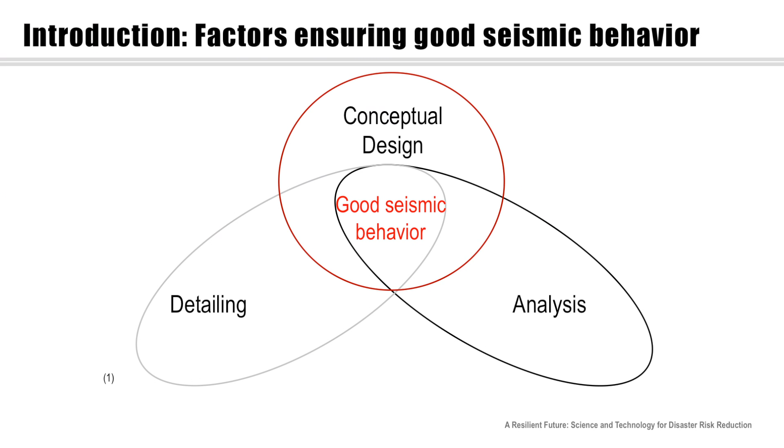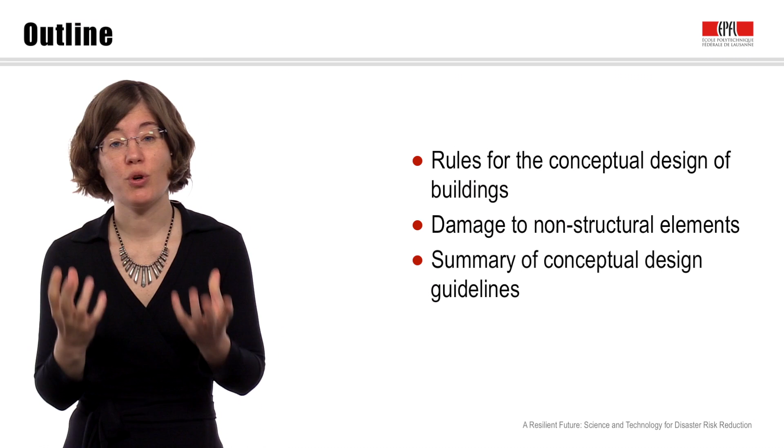This presentation starts with some general rules for the conceptual design of buildings. Then we will look at damage to non-structural elements - elements that are not important for carrying loads during an earthquake, but that can still be damaged. And then we will conclude with a summary of the main points.

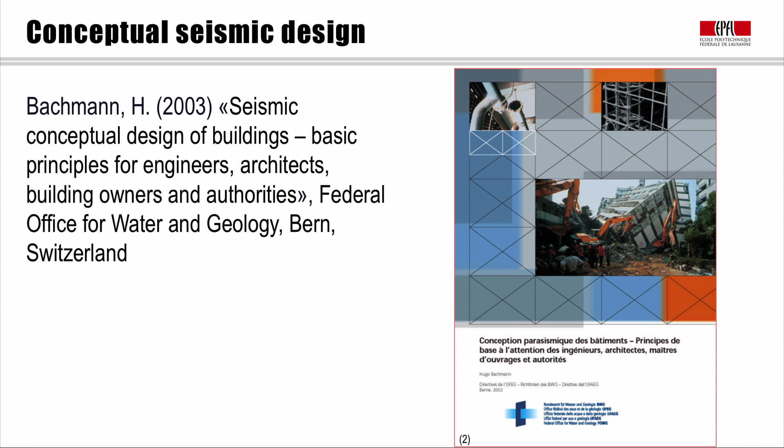A large part of this presentation is based on the booklet by Professor Hugo Bachmann, Seismic Conceptual Design of Buildings, which has been translated into many languages and is available online. It's an excellent introduction to the conceptual design of buildings.

The first step of the conceptual seismic design concerns the choice of the structural system. Many different systems can be chosen; the most common ones are structural walls or frames. Which system is most suitable depends on the height and the use of the building. Typical construction materials are reinforced concrete, steel, and timber.

All of these materials can behave well during earthquakes, provided they are designed so that the structural elements have sufficiently large displacement capacity. Masonry can behave well if it's reinforced. Also, in countries of low seismicity, unreinforced masonry buildings with stiff concrete slabs might be okay.

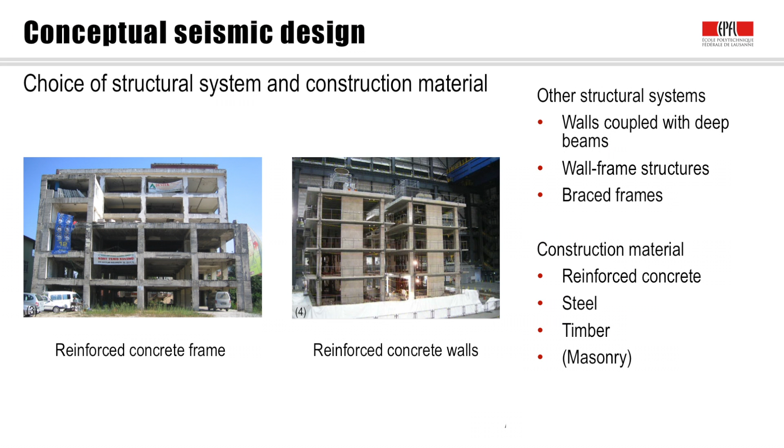However, stone masonry buildings, like those built in the past, or adobe masonry structures with flexible timber floors, are among the most vulnerable structures during earthquakes and often cause a large number of casualties. Independent of the choice of structural system, one should aim for a simple and robust structural system.

That means a system that is relatively regular in plan and elevation, and that has some redundancy. The behavior of a building is a very complex affair during an earthquake: the building is shaken in all directions, the loading is cyclic, going back and forth, and during a large seismic event, which drives our seismic design, we also expect buildings to undergo inelastic deformations. Simulating this behavior with computers is today still a very challenging task.

Moreover, we never know exactly how the next earthquake will look like. For this reason, it is really very important that we choose a structural system that is robust and simple, so that it's easier to understand, predict, and build.

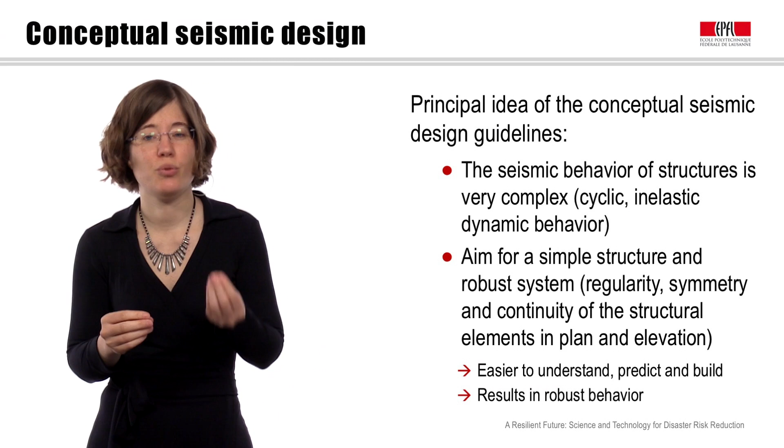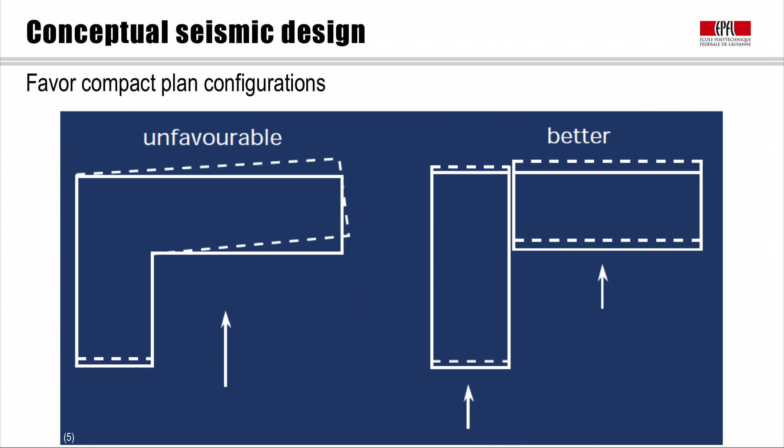To achieve this goal, we should aim for a simple and compact floor plan configuration. For example, if we have such an L-shaped floor, like here on the left, it might be better to split it into two rectangular floors, like here on the right.

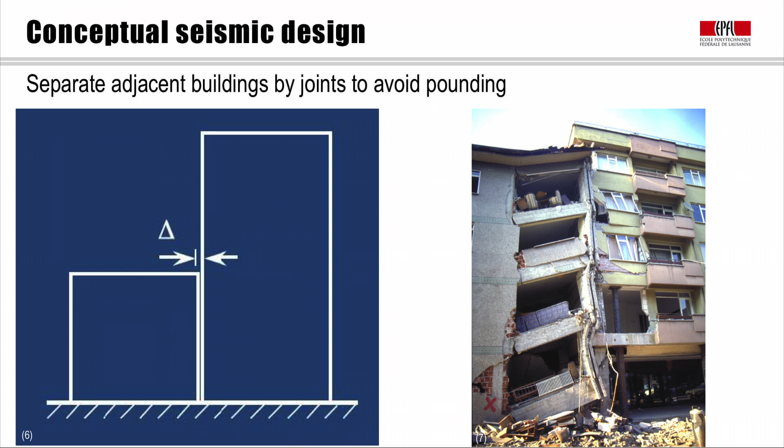But the building had another problem. Next to this complex floor plan, each wing was also made up of 2 structural systems. The main part of the wing consisted of frames, which are rather flexible, but the end part of each wing was the staircase, built with relatively rigid walls. So these walls are much more rigid than the frames, and during the earthquake the frames were leaning onto the walls and transferring their forces to them.

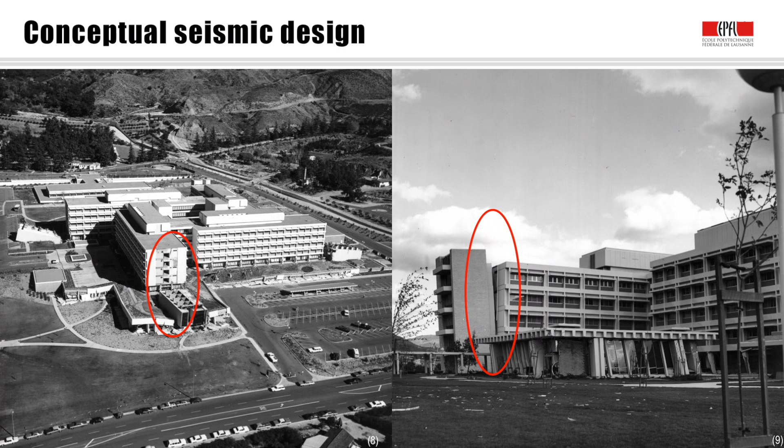So if you combine 2 structural systems in one building, it is important to remember that you need to design the stiffer structural element to take forces from the more flexible one, and you also need to design the slabs to transfer these forces.

So this wall is rather eccentric to the center of mass, which is at the center of the slab. Due to this eccentricity, the building will not only translate, but it will also rotate. So the behavior could really be improved if we added another wall on the other side.

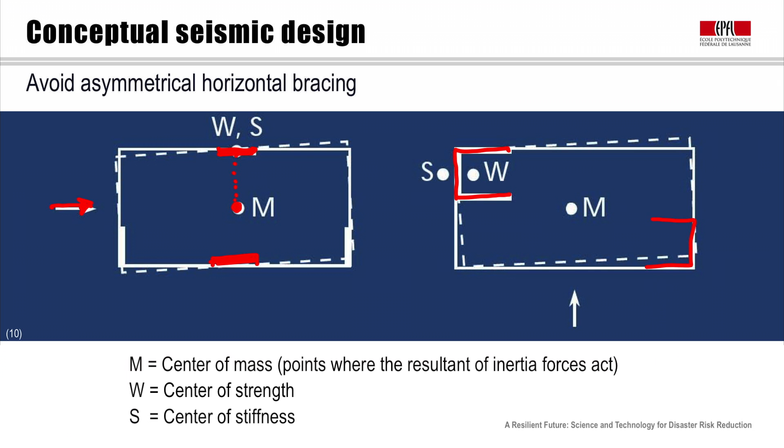The same applies to the building on the right. Here we have a core wall, often used to accommodate staircases and lift shafts, but again this wall is very eccentric with regard to the center of mass. The behavior could be improved if we added, for example, another core wall, or simply a wall on the other side of the building.

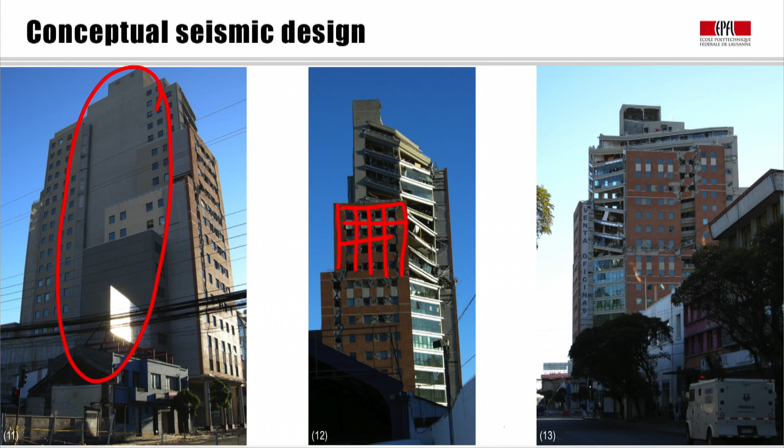An example of a building with an asymmetric floor layout is the O'Higgins building in Concepcion, damaged during the 2010 Chile earthquake. At the back there's a long, stiff wall. On the other 3 sides, we have many windows, making those sides much more flexible than the back, which can introduce some rotation to the building.

So if you use walls to brace a building, it's good to have at least two walls in each horizontal direction. The structural engineer can design these walls to behave in a ductile manner, meaning they have a large deformation capacity. This deformation capacity is really key to a robust structural performance, so it's a very important point.

If we place these walls at the perimeter of the building, we also obtain the torsional stiffness that we need. Walls are also good to control the deformations of one story.

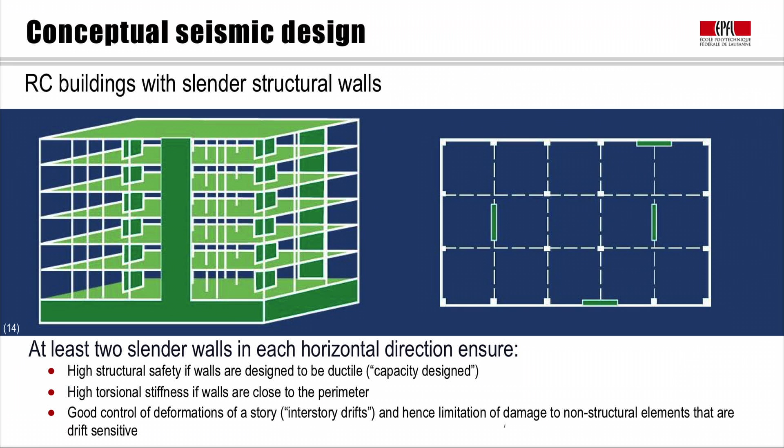This will limit the damage to some of the non-structural elements. We will talk about this later.

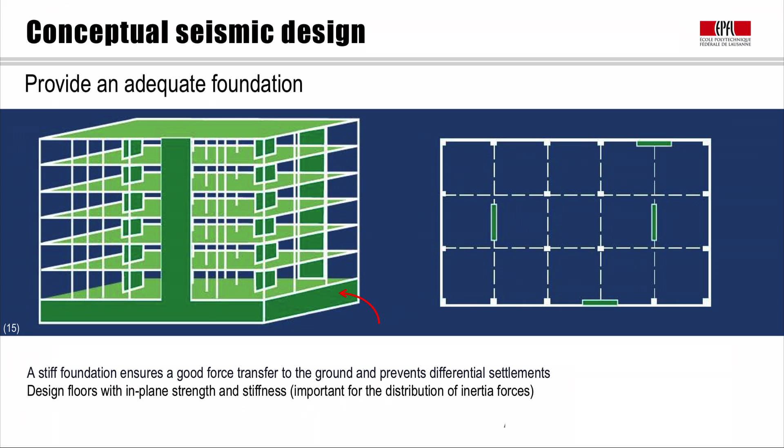One part of the building that we don't normally see, but which is very important for the seismic behavior, is the foundation. We need it to transfer the forces created as inertia forces in the upper part of the building to the ground. A stiff foundation ensures good force transfer to the ground, and it also prevents differential settlements between the walls, limiting damage to the building.

Another important element of the building is the floors, the floor slabs. We should choose systems that are relatively stiff in plane. This allows us to transfer the forces from the floors back to the walls, and the walls can then take the forces down to the foundation. If the floors are stiff in plane, it allows us to distribute the forces well between the different walls.

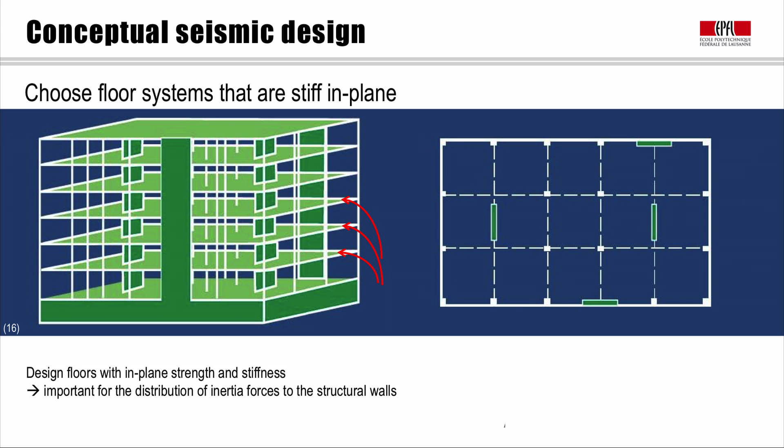An example of a building with irregularities in the elevation is again the O'Higgins building that we've seen before. This building has several setbacks over the height of the building, and that might have really contributed to the damage.

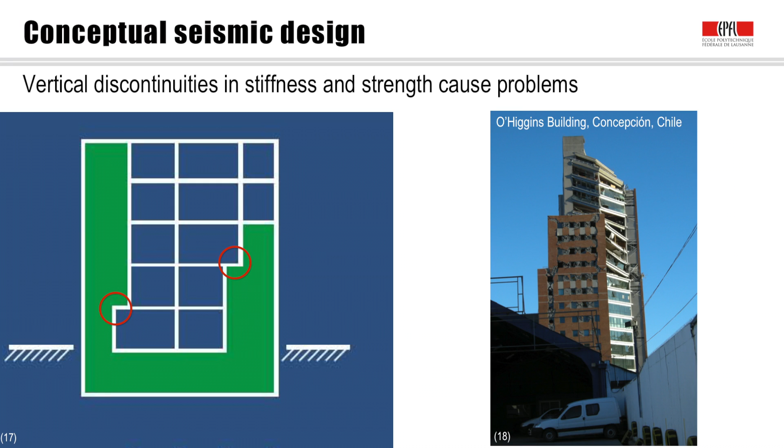One of the most common causes for the collapse of buildings during earthquakes is the soft story mechanism. Often the ground floor of a building is used for shops or parking spaces, and for these uses we need large open floor areas. The top floors, on the other hand, are often used for offices or apartments, and we need walls to separate the rooms.

As a result, we obtain a rather rigid box of the top floors that sits on a really flexible ground floor. So when the building is subjected to an earthquake, all the deformations will concentrate in this flexible ground floor, and the deformation demands will soon be too big for the story, and the story will collapse.

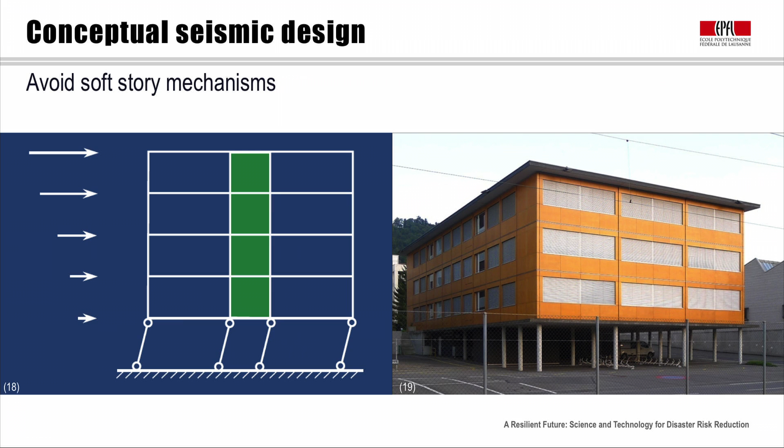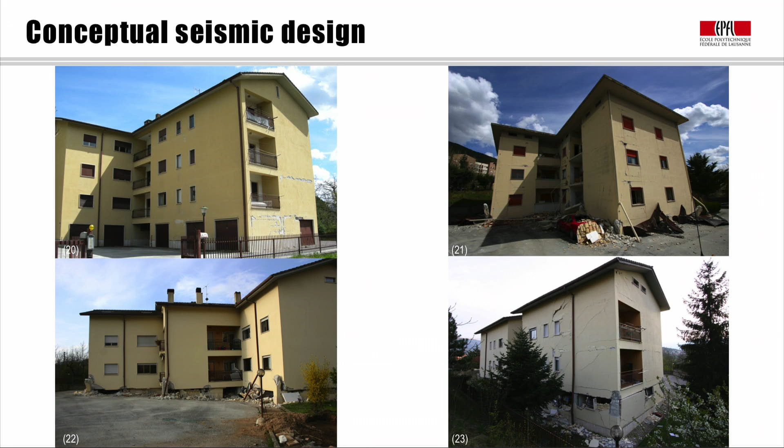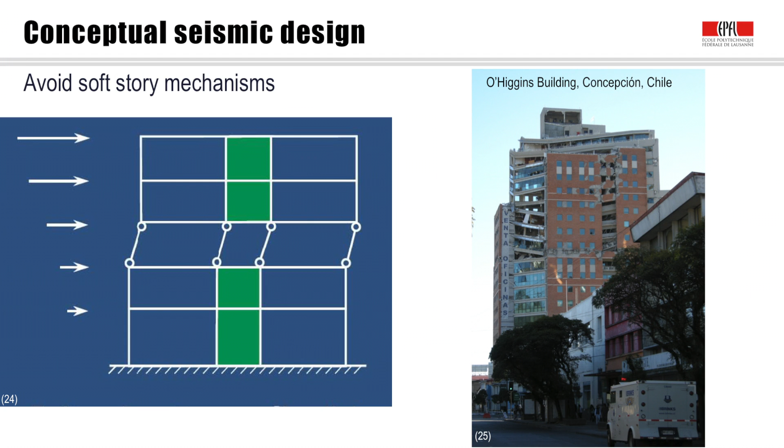Let's now look a little bit more in detail at the other structural system, frames, that we mentioned before. Reinforced concrete frames are often filled with masonry. One calls this masonry infills. The interaction of frames and infills is really rather complex.

Frames as such are rather flexible. The masonry infill, however, is rather stiff. The frame is the primary structural system and carries most of the horizontal loads. But when it tries to deform under an earthquake, it pushes against the masonry infill, and a diagonal compression strut develops in the infill and prevents part of the deformation of the frame.

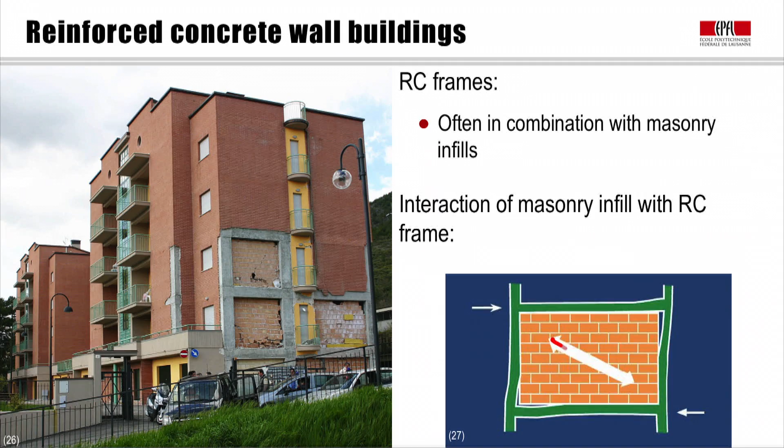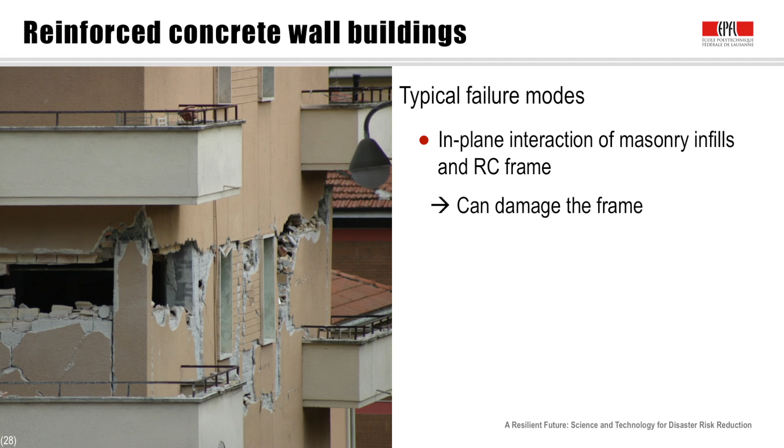This can have two effects. For one, this force in the diagonal compression strut can become rather large, and when it pushes against the reinforced concrete frame, it can damage this frame, and in particular the joint. You can see an example of such damage here on the left. Further, this force can also damage the masonry infill itself and lead to typical diagonal shear cracks.

If an infill is cracked in shear, it becomes very vulnerable to out-of-plane accelerations. These are the accelerations that act perpendicular to the plane of the infill. If the infill is cracked, then only small out-of-plane accelerations are often sufficient to make the infill fail out of plane. This causes repair costs, but more importantly, the falling infill is also dangerous to people outside the building. And there's another point to consider.

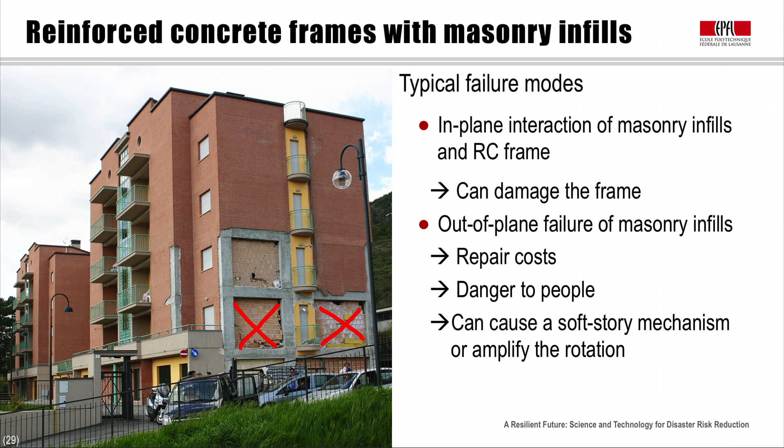The failure of infills can also increase the likelihood of a soft story mechanism, and it might amplify torsion.

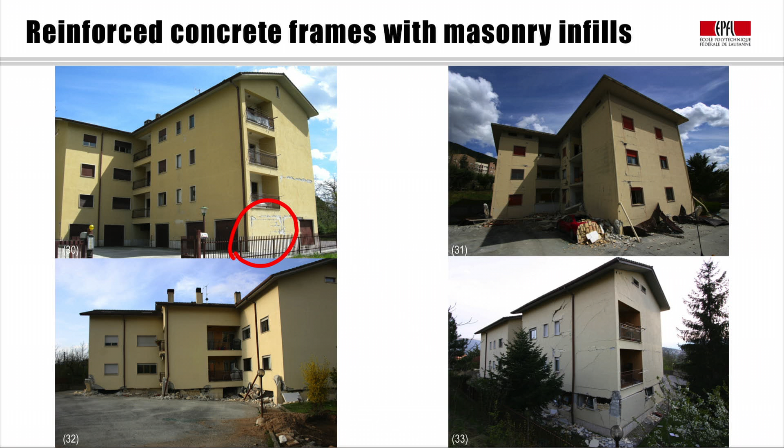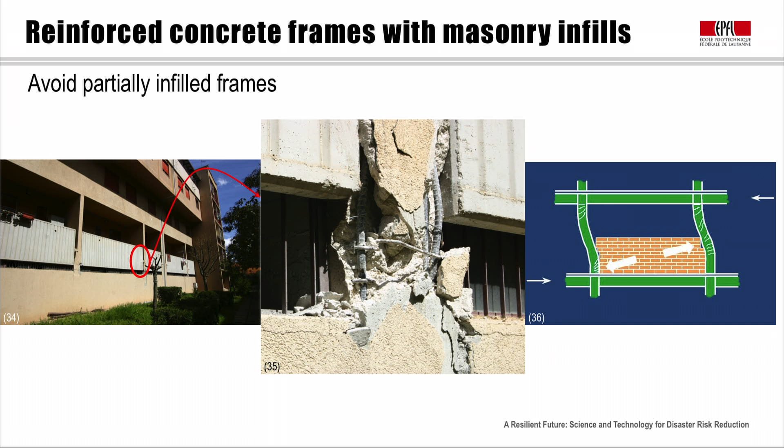Sometimes the masonry infill does not reach over the entire height of the story, but part of the story is left free for window openings. One calls this a partial infill. These infills are particularly dangerous because they create short columns. These short columns are subjected to very high shear forces because most of the deformations in the columns really concentrate in the free part of the column.

So far we have talked about how earthquakes can damage structural systems. But the financial loss due to an earthquake has more components to it. We call these the three Ds: death, damage, and downtime. The downtime is the loss caused when businesses are out of operation after an earthquake. Our primary goal of seismic engineering is, of course, to minimize the number of deaths, so the number of casualties and injured people after an earthquake. But minimizing damage and downtime is also important.

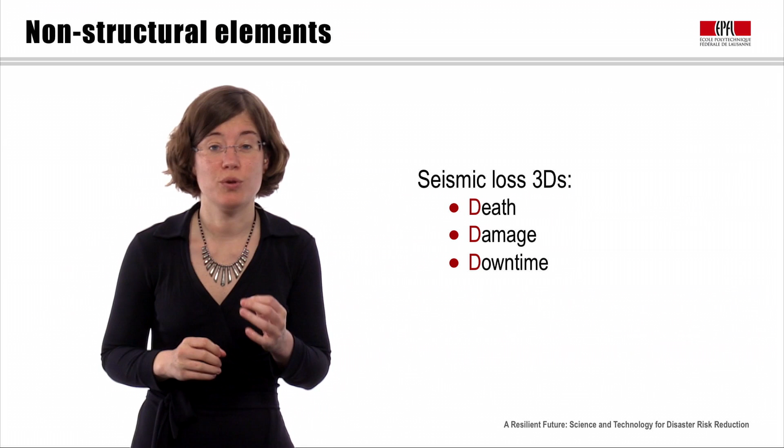And when we talk of damage, we have so far considered the damage to the structural components, but also the damage to non-structural components can be very important. The non-structural components are all these components that are not contributing to the load transfer in a building, and also the content of a building.

In some types of buildings, like for example hospitals, the costs caused by the damage to these components can be much larger than the costs caused by the damage to the structural components. So now we will look at some of the typical non-structural components and how they can be damaged.

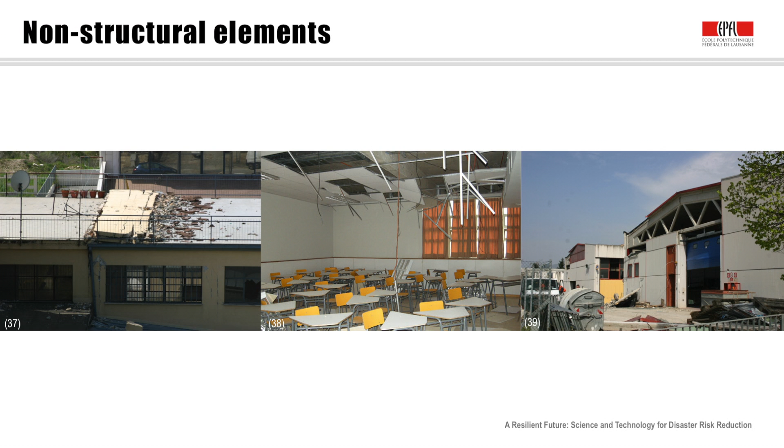Here we see some examples of non-structural components that failed. On the left, a partition wall that fell over. In the middle, suspended ceilings that fell down. And on the right, facade elements that fell down. And it can have secondary effects like blocked emergency exits, it can cause fires, or the emission of dangerous substances.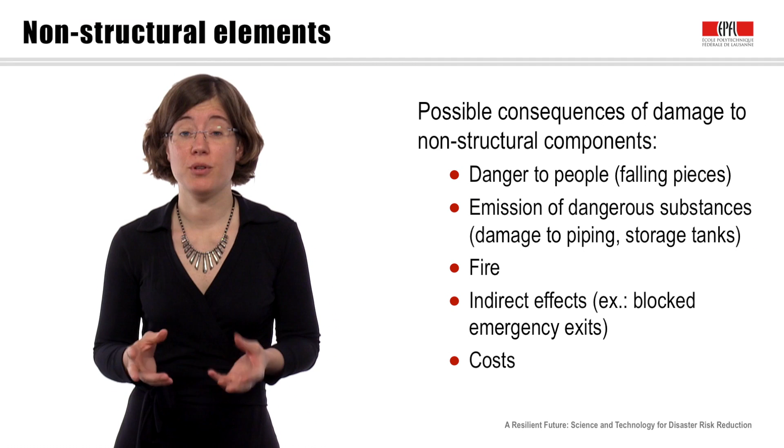So this was a brief overview on some fundamental aspects of the conceptual seismic design of buildings. To implement these effectively, it is really essential that architect and engineer work closely together right from the start of the project. We have also seen that we should not stop with the design of the structure system, but that we also need to consider the non-structural components. Their failure can be very dangerous and costly too. If we consider these guidelines, we can achieve that buildings are safe during earthquakes.

The problem today lies really with existing buildings that have been constructed without considering these guidelines. Many of the most vulnerable buildings, such as buildings from past centuries, are part of our cultural heritage. The question of how we can retrofit these without destroying their characteristic features is a current research topic.